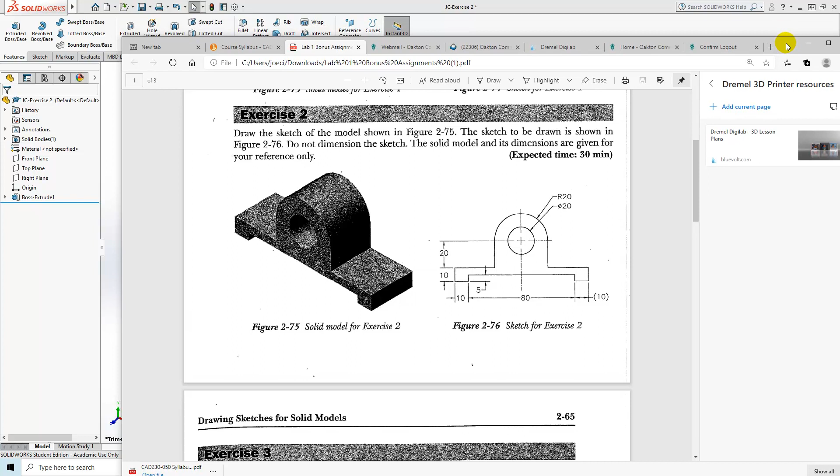Bonus exercise number 2. We're going to draw this part here. It's in millimeters, and I think we can beat this time of 30 minutes, no problem.

Here's what the completed part looks like.

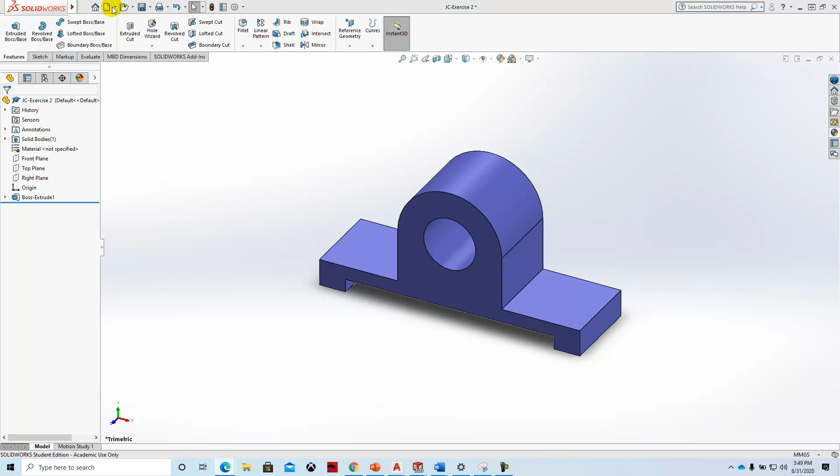I'm going to start a new part by clicking on the new part. I'm going to set the measurement units to millimeters. I'm going to remove the swatch.

I'm going to start a sketch on the front plane, and I'm going to start with the circular geometry right at the center of the origin. So that's a 20-millimeter diameter circle, that 20-millimeter radius.

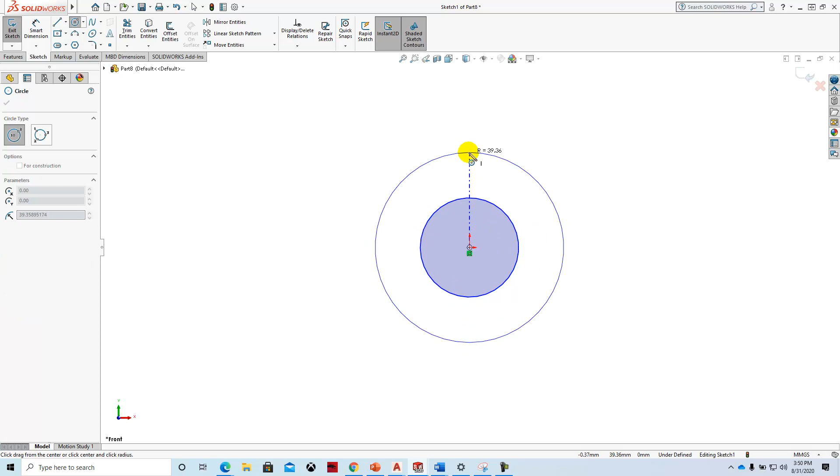I'm going to draw a center line. I'm going to wake this up, draw it up, and then I'm just going to draw it through the part. Hit escape.

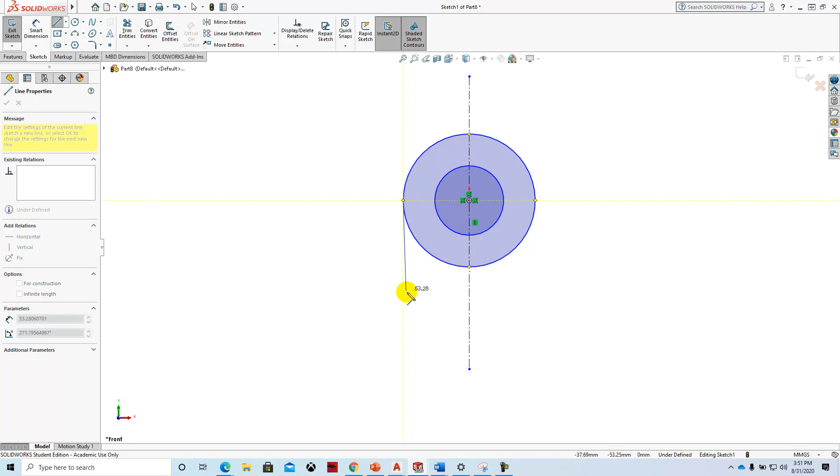Line. Wake up this quadrant, and you can wake it up by just hovering over it until it turns orange.

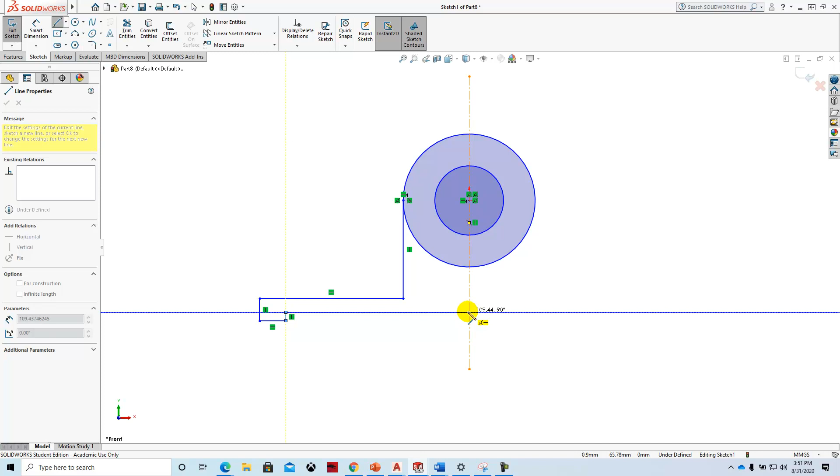Solidworks likes to work with symmetrical parts, and so one of the techniques that I encourage is to draw half of the part and mirror it before you start putting the dimensions on, because that way when you dimension it, it will have symmetric relations. So we're going to do that.

We're going to say mirror, and then we're going to select those entities. We're going to mirror it about the center line.

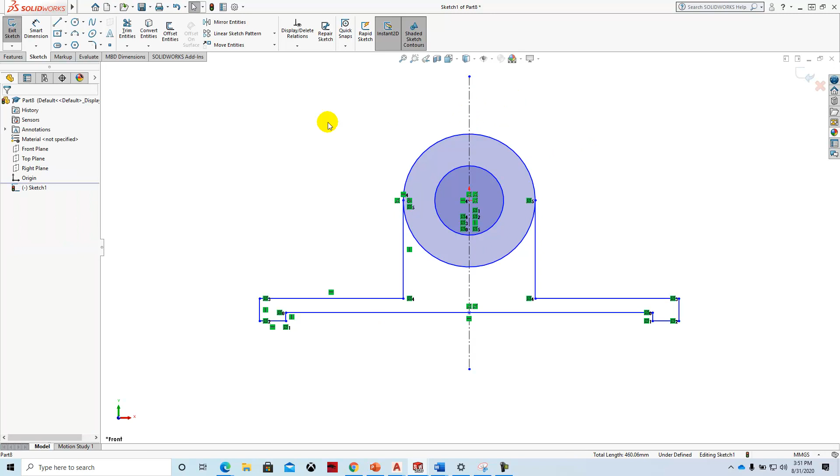And then we're going to trim. We're going to add our dimensions.

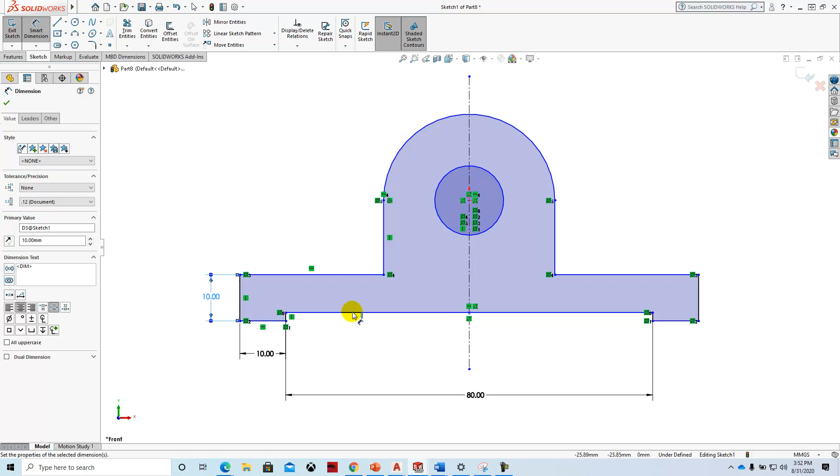And you'll notice that they update on both sides of the part, and that's because we mirrored it.

So we have our part sketch created, and we can see that it's fully defined, meaning all the geometry is black, which means that the computer knows where all those entities are in relation to the origin.

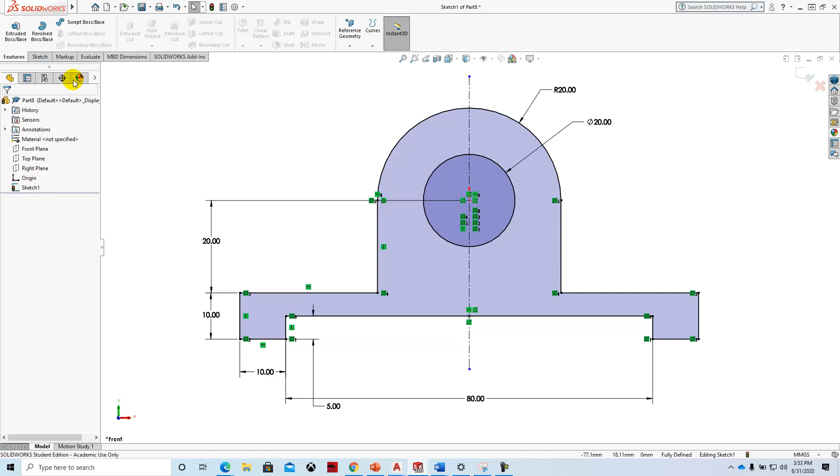We're going to click on Features, Extruded Boss Base, and I'm going to extrude this mid-plane. And again, they didn't give us any dimensions, so we can just kind of make it look right—50 millimeters looks about right.

Let's add some color to it.

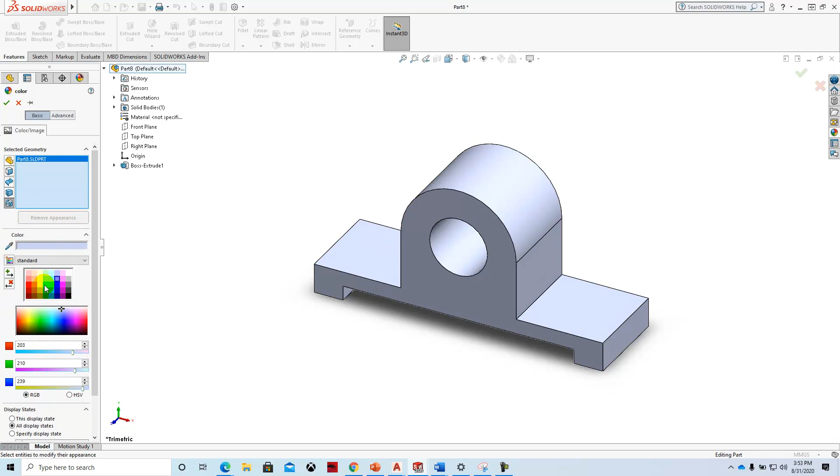Save it. Use your initials.